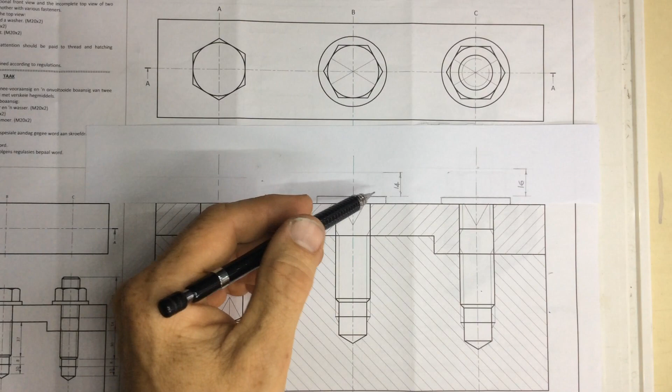Right, what we're going to look at today is the idea of using a nut and bolt stencil in order to draw all of these nuts and bolts. So far you've done the nuts and bolts using the construction methods, but if you can find a stencil that works, well, it's going to save you a huge amount of time. You start out and you've got all the thread detail, etc.

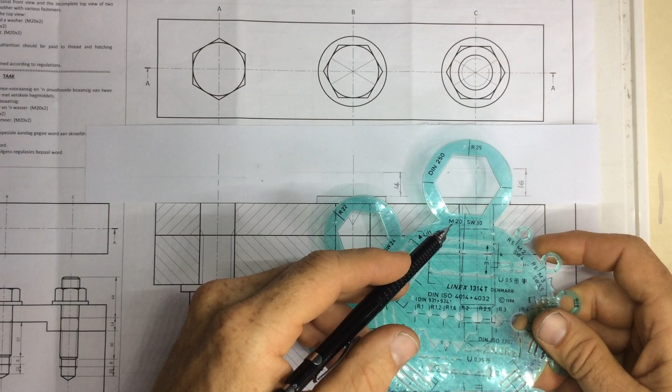This is an M20 nut and bolt story that we're looking at, so we need to look at our stencil, and it says over here M20. So straight away, well, we can see that that little hexagon that they've got there fits around that hexagon of the top view of the nut over there. That'll save you time actually constructing it.

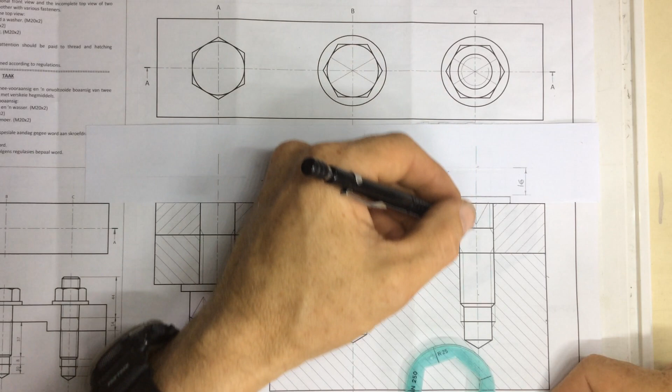And then we come down over here, we do our calculation to find out how high that nut is. It's the M20 multiplied by 0.8 for the nut, and that gives you a value of 16 over here. I've got a center line that's coming down here. I've got a line that I'm going to draw across over there, so I know the height of the nut. I'm going to take my 0.5 pencil.

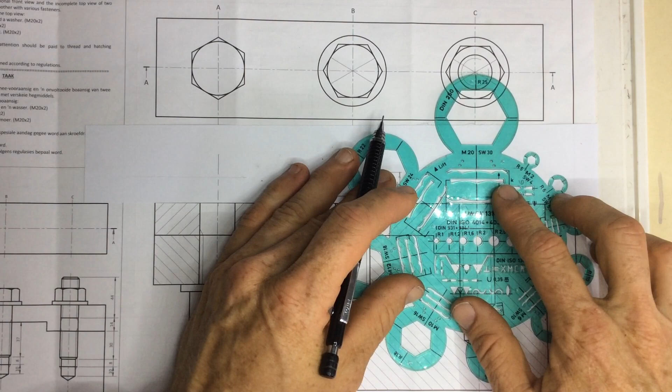I'm going to line my stencil up with that line at the top there. Okay, so there's a line coming across over there. This line at the top of the stencil over here is going to be lined up with that. The center line lined up, and I can then place the point of my pencil in here. I draw along the top, and then I draw along the bottom of the stencil, and I have the drawn out nut perfectly aligned over there.

Do the same thing with this bolt. Obviously the bolt height is 14 because it's 0.7 multiplied by M, which was 20. Here we go. I'm just going to nudge out a bit more lead, pop that in there, run it across and down, pop it in there and do the bottom side of it, not moving that stencil.

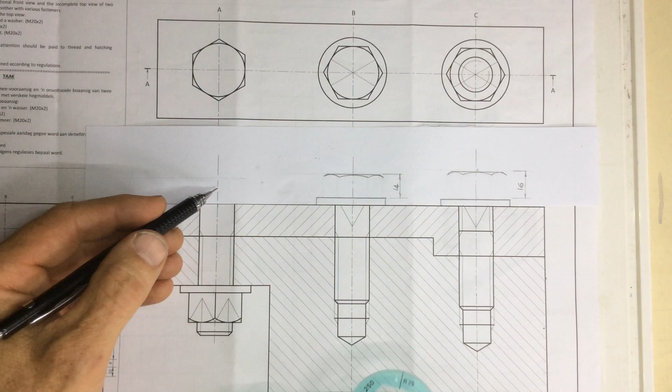I then come across to this one over here. I've got two faces, and I've done my calculation. That's 14 millimeters to that line coming across there. I'm going to look for the stencil that has got two faces on it. I line that up. There it is, the two faces.

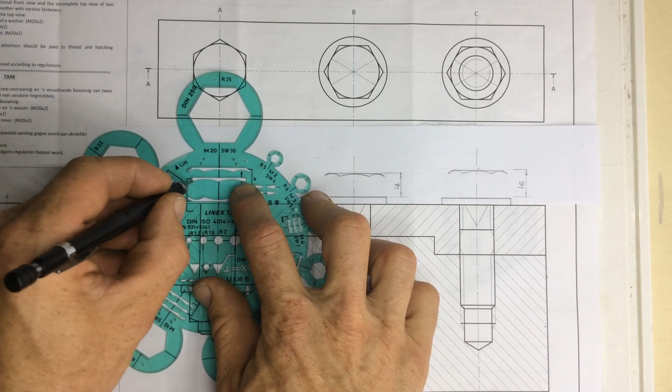Start over there, draw the line up, across, down, there, the two humps, and I can now just finish that off using my set square. Draw lines coming down over here. I think that there's meant to be a washer in here as well, which I need to just draw in.

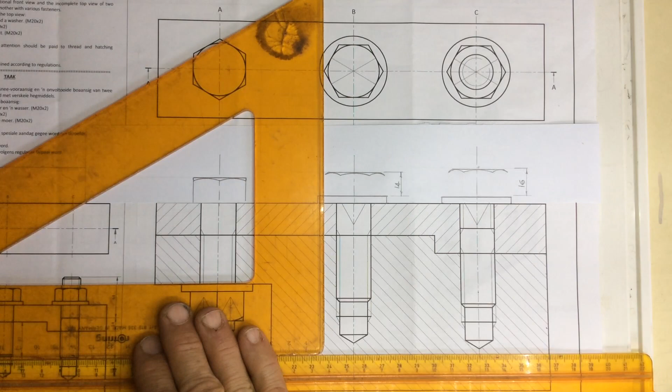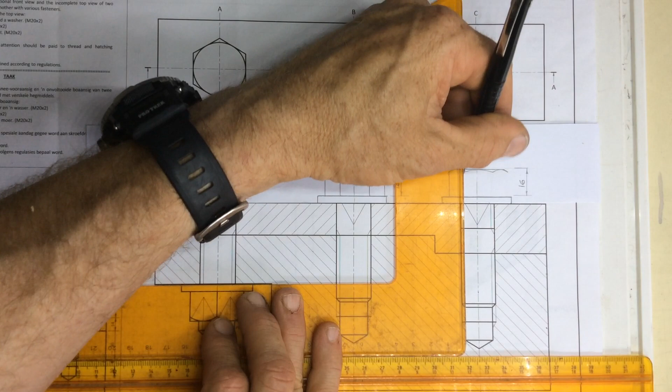And over here, I'm going to just draw those down there. Go to that little intersection over there, put that in there, over there, cross and draw that in there, go across to this, draw that in, go across, draw that in, draw that across, draw that in, and draw that in.

I'm guessing if you don't have a nut and bolt stencil yet, you'll be going out this afternoon and buying yourself one. Thanks.